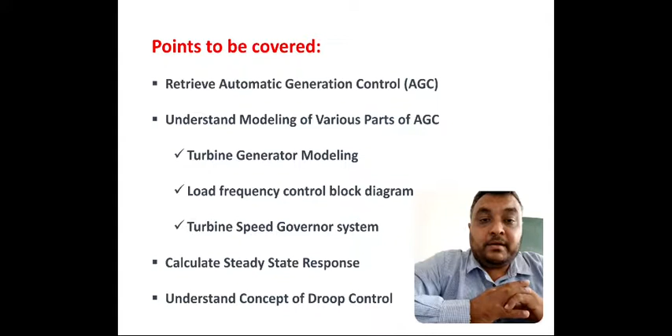Today we are going to learn about chapter 1, automatic generation and voltage control, and these are the points we are going to cover in this session: understand automatic generation control (AGC), modeling of various parts of AGC, turbine generator modeling, load frequency control block diagram, turbine speed governor system, calculate the steady state response, and understand the concept of droop control.

In the introductory part, we will see an interconnected power system where numbers of generators run in parallel. In an interconnected power system there is more than one generator and they are running in parallel. The different generators in the system may be running at different speeds depending on the number of poles.

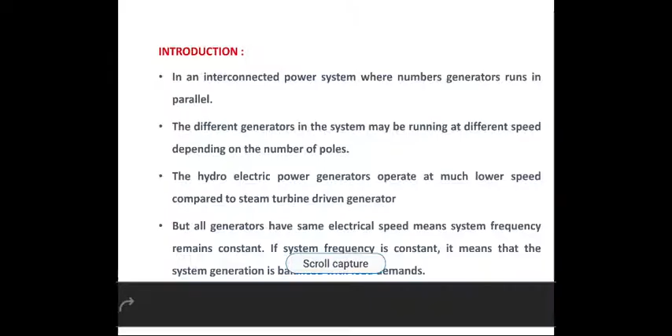Consider hydroelectric power generators, which operate at much lower speed compared to steam turbine driven generators, but all generators have the same electrical speed, meaning system frequency remains constant. So our ultimate aim or goal is that the frequency should remain constant. If system frequency is constant, it means the system generation is balanced with the load demand.

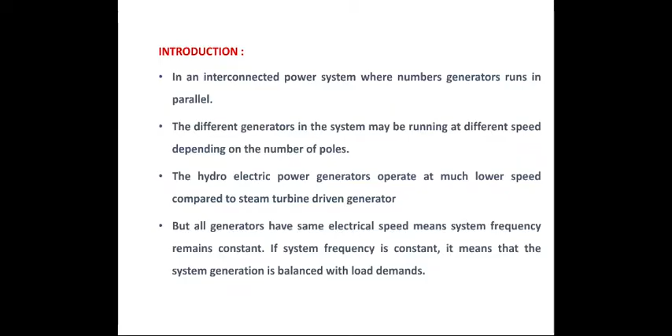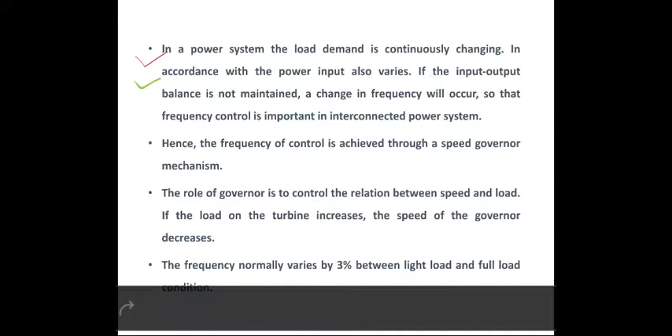In a power system, the load demand is continuously changing, and in accordance with that the power input also varies. If the input-output balance is not maintained, a change in frequency will occur, so frequency control is very important in an interconnected power system. Hence frequency control is achieved through a speed governor mechanism.

The role of the governor is to control the relation between speed and load, and if the load on the turbine increases, the speed of the governor decreases. The frequency normally varies by 3% between light load and full load condition, and there is an ideal situation where we can focus to control the frequency.

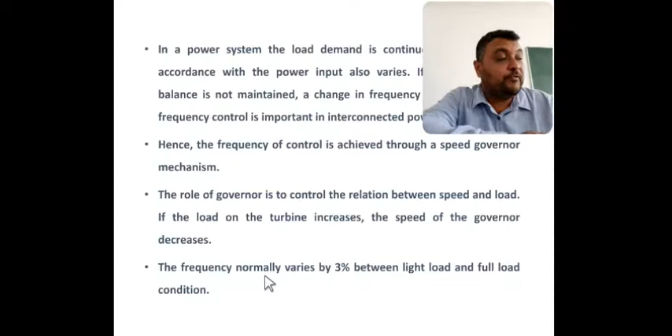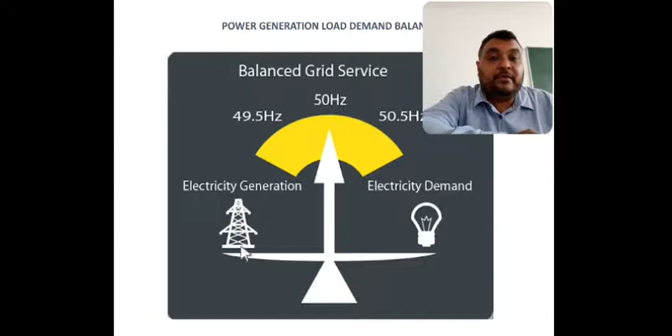Now we will see how we can make this frequency constant. Here is the turbine generator modeling, and from that turbine generator modeling we will see automatic generation and control, then the block diagram of load frequency control, and modeling of various parts.

In that modeling we will see the turbine speed governor system, turbine model, generator model, and the concept of control area.

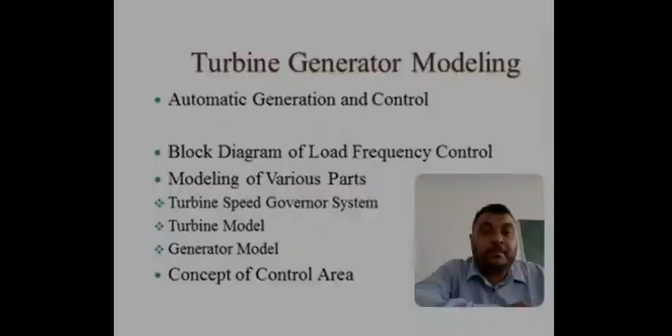For any power system there are four main important components: active power, reactive power, voltage, and frequency. These are the main four important components, you can say. That is one, the active power P.

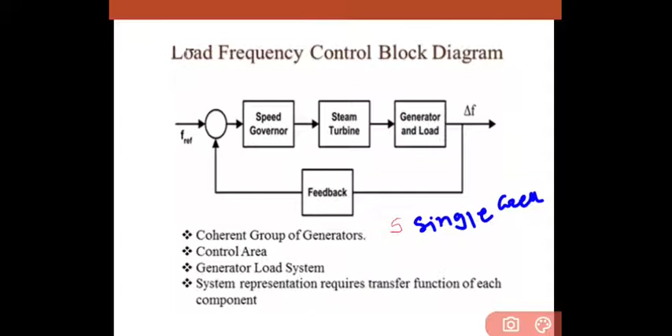When you are considering a single area load frequency control, that is single area LFC, or two area load frequency control, when you consider a two area LFC, that is load frequency control, it becomes a more complex part.

It might be more than two areas which exist nowadays, that is possible, more than two areas could exist. So you must understand what we have to do for that.

In that block diagram you can see this is a load frequency control block diagram. Over here you can see there are different parts: speed governor, steam turbine, generator and load. So at the output there is delta F.

It is continuously monitored and sent through the feedback signal over the reference signal, and at that point reference signal and feedback signal meet, and according to that the speed governor changes the position of its valve, and then it feeds to the steam turbine, and the steam turbine adjusts the generator and load. So that's how load frequency control is working.

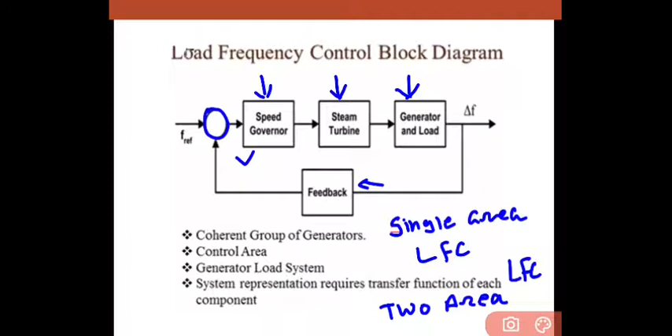In next we will see how this whole system works. In India our system is working on 50 hertz. So we always try to make constant frequency of 50 hertz, but it cannot remain constant always at 50 hertz because there is a continuous change at the load side.

So there must be existence of some control that will keep your frequency at 50 hertz. There is some feedback which measures the error and continuously gives it to the reference signal. So when output frequency changes, it is sensed by this feedback signal, and the signal is fed to the speed governor and then the error is reduced.

So here we are considering a single area. Now what is meant by that area? That area is called a set of coherent generators. And what are coherent generators? The generators which are behaving similarly. So here we are considering the single area system, and we will see what coherent generators are. As per the definition, coherent generators are those behaving similarly, which is known as coherent generators, meaning they are synchronizing with each other and running in synchronism with the same speeds.

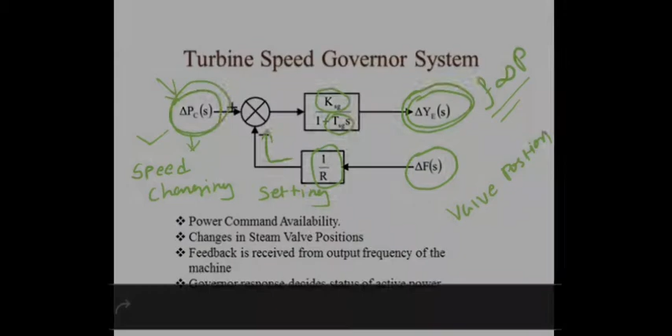So next in the power system, your part is the turbine. After the speed governor, you can see in the first block diagram there is a turbine. The output of the speed governor system, which is del ye, must be given to the turbine. Now we will see the transfer function of the turbine model.

Okay, so it is a turbine model. Consider this turbine model, generally a two-stage turbine model, and for this kind of analysis I will explain this two-stage turbine here.

There will be an HP turbine and an LP turbine. HP turbine means the high pressure turbine, and LP turbine means the low pressure turbine. So HP turbine and LP turbine.

Now, the steam comes from the boiler to this HP turbine. Some work is done and temperature is reduced. So to bring it back to a particular temperature, it goes back to the reheater, and from the reheater it comes back to the LP turbine. That's why it's called a two-stage turbine, because it has two stages. Now, for a two-stage turbine there will definitely be two time constants, but for ease of calculation we consider a single equivalent time constant here. So the turbine is two-stage, but we use a single equivalent constant.

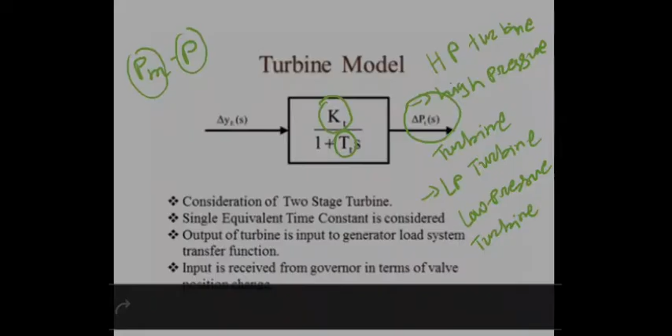Change in supply minus change in demand is the difference represented by del Pm minus P - the electric power supplied versus the power demand. The difference between supply and demand is realized as acceleration power. These things are realized, and the output of the generator load model is nothing but change in frequency. Now, if you want to express all the components together...

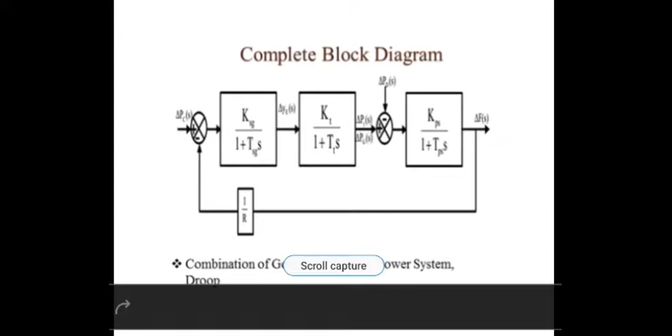We have to take the complete diagram into consideration. Here you can see the complete block diagram of the whole system, which we've seen built up separately from the beginning. If you want to express all the components together to form the complete diagram, we just combine the separate diagrams we've seen. This first block is our speed governor, this is the representation of the turbine, and this is our generator.

We combine all things together. We've seen that one feedback signal is taken from the output frequency. This signal, along with 1 by R, is related to droop. So this combination of governor, turbine, power system and droop is working for the load frequency control. We understood the separate blocks of governor, turbine and generator, and combined all those blocks to form the overall complete block diagram.

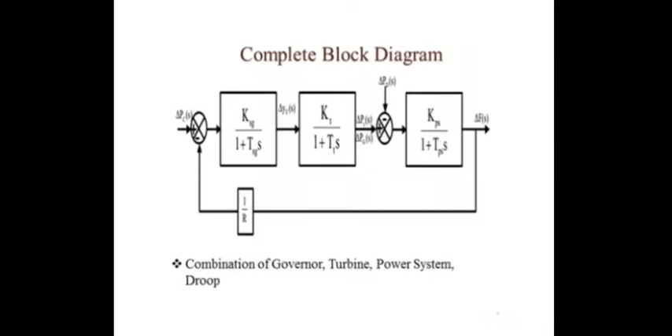Next we will see the diagram for a single area - consider it a single area load frequency control. Now we will see the steady state analysis for the power system, considering change in load demand.

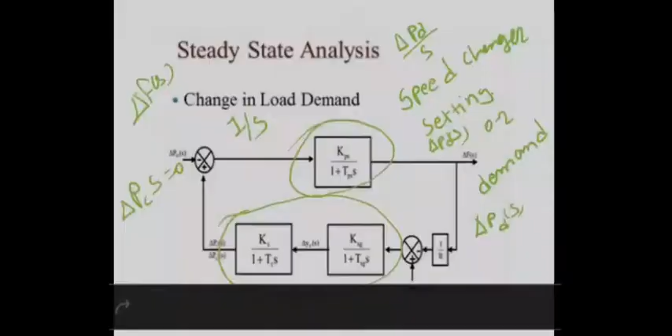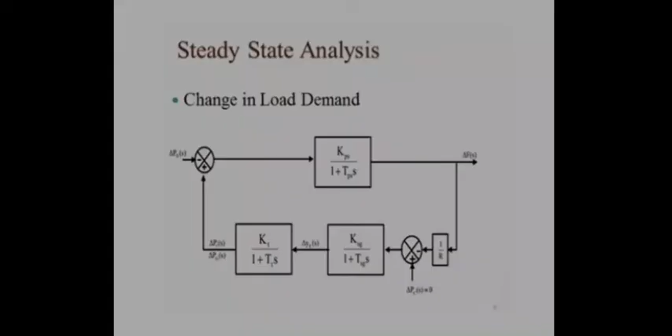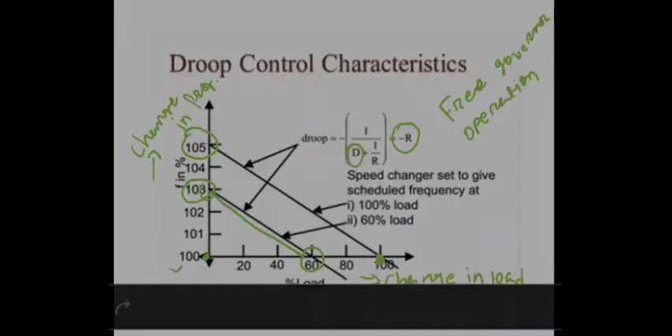Now we will move forward to the steady state analysis once again, now considering change in speed changer setting. Instead, in the first case we considered delta Pc is equal to 0. Now over here we are considering delta Pd is equal to 0. That means there is no change in demand and there is some speed changer setting.

So similar to our earlier delta Pd of s, there will simply be delta Pc of s. If you compare to earlier, your input will be delta Pc of s, that is your input. With knowledge of control system, you can calculate the transfer function of this part and you will get the output frequency.

Now the other discussion is, whenever you are calculating this, there will be two time constants: time constant of governor system, that is speed governor, and time constant of turbine. So the gain of speed governor into the gain of turbine is going to always be 1. This kind of approximation we are doing for the analysis.

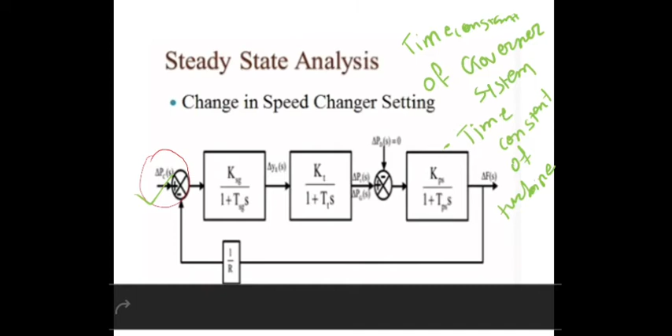So here we discussed the conceptual understanding of single area load frequency control, and we also discussed the different block diagrams and different transfer functions. This understanding is very useful whenever we are doing the steady state analysis of the power system.

Now next we will see some of the GTU questions that were asked in previous year GTU examinations. It can be asked to draw and explain a neat sketch of turbine speed governing system, or explain the speed governor system of turbine.

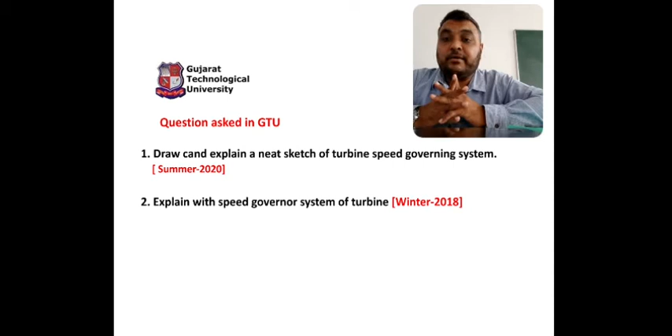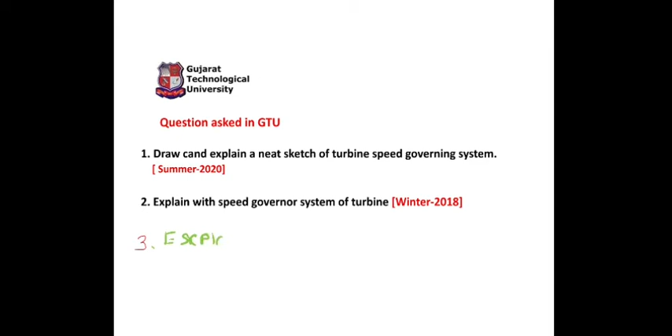It can also be asked to explain steady state analysis or transfer function of power system or speed governor system. And it can also be asked to draw and explain droop characteristic.